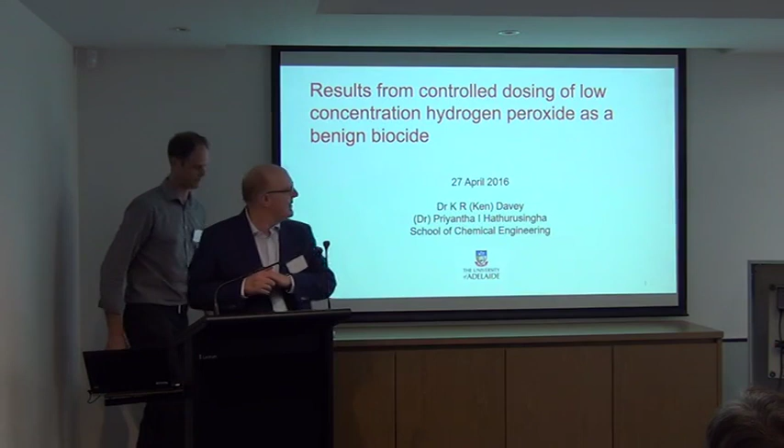So the talk is simply, the emphasis is on results from controlled dosing of hydrogen peroxide as a benign biocide. This work becomes very important. And tomorrow, Priyantha will get his PhD conferred at the university, so we can honour him in a small way here.

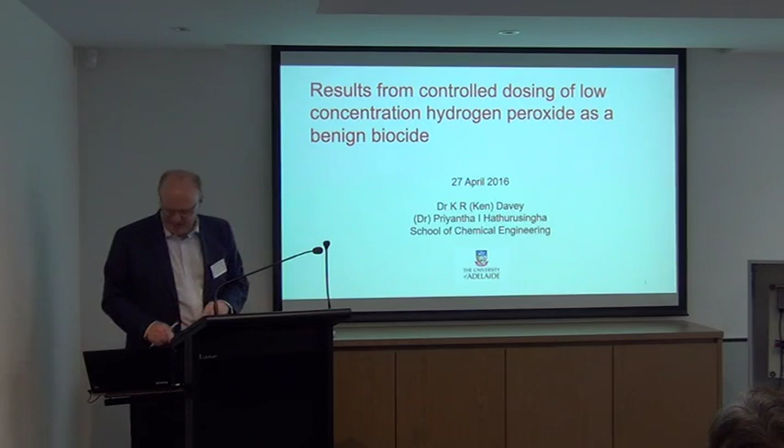All right. So the problem is in RAS farming, often you get cyanobacteria and other things, and they produce metabolites. Two of these are problems. They're geosmin and MIB, and they accumulate in the water, and then they eventually make their way into the fish flesh. And that gives quite an unsatisfactory taste, and you end up losing the sale of the fish as a premium protein.

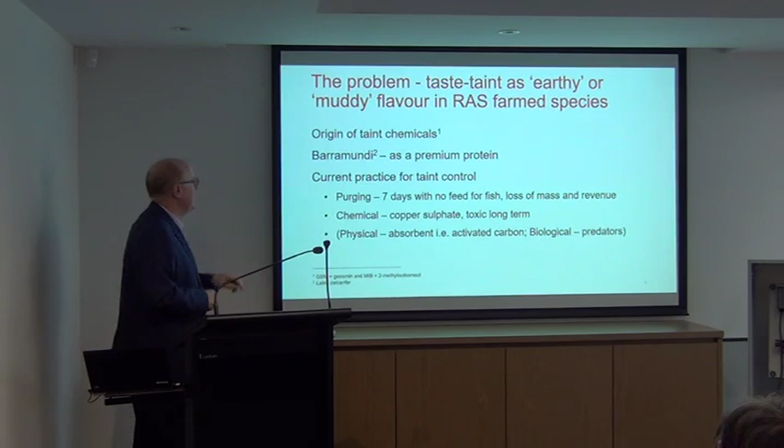So the current practice for taint control is purging, so you just have some clean water, and you don't feed the fish. So the problem is, of course, you're going to end up with a loss of mass and some revenue and some time wasted. You can use chemical things like copper sulfate. Long term, of course, they're toxic, and there are other approaches as well. So by way of background, you can grow a lot of other things other than barramundi, but we work with barramundi because it was available.

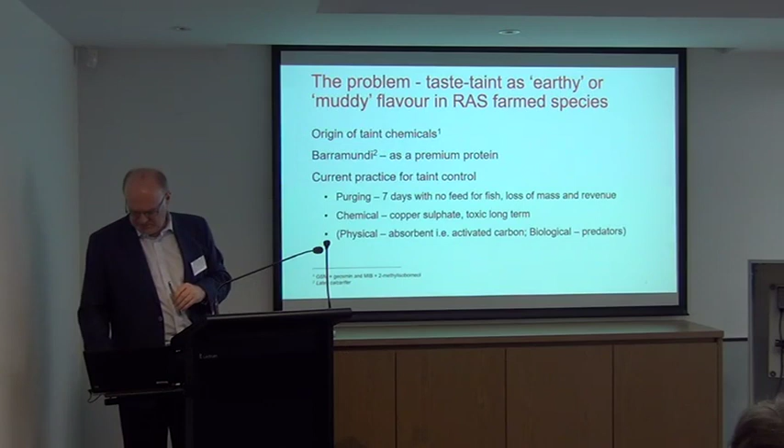So I'm going to introduce the talk, then I'm going to ask Priyantha to present some of the quite detailed work, and then I'll summarise with one slide the conclusions, and then we'll take some questions if you like. So hydrogen peroxide, the idea came to me, if you like. I did my postdoc up in Brisbane with CSIRO, and 100 years ago they were milking cows on the Atherton tableland, which is pretty hot. And so I was very interested to know how they got the milk down into the cities without refrigeration.

So well over 100 years ago, they were permitted to add hydrogen peroxide to the milk. The only byproduct is oxygen and water, so therefore it's perfectly safe. And this morning you probably exposed yourself a couple of times to hydrogen peroxide if you cleaned your teeth, dyed your hair, cleaned the bathroom, toilet, whatever. So it's quite a safe thing. So it's no chlorine, it's just hydrogen peroxide.

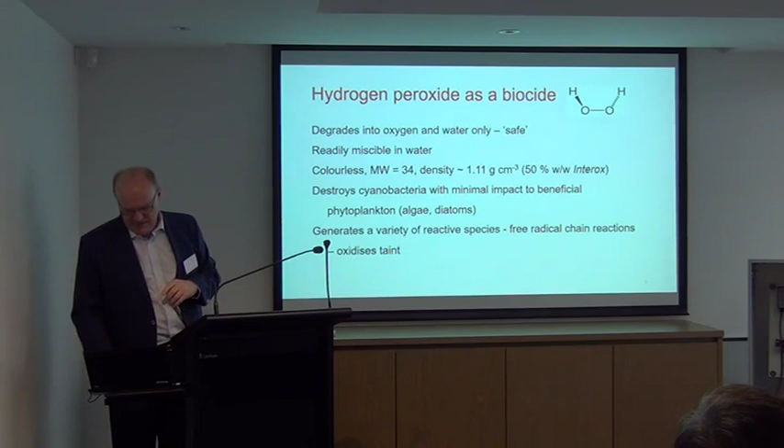So what we needed after the idea was to deliver the hydrogen peroxide. We had absolutely no idea of what concentrations and so forth. And Tim and Jerry have mentioned how we approached them. And unusually, actually, for industry, they were extremely positive. And they came to the university, we gave a talk, and the whole thing took off from there as really a gentleman's agreement.

For Priyantha to get going, you may know we needed Animal Ethics Committee science approval. South Australia is the only state in our Commonwealth where fish are animals. So in every other state, they're non-animals. That actually worked to our advantage, which I'm happy to talk about later actually. So he did a 3 months course, sat for an exam, had to get 80% pass to learn how to kill fish. We weren't allowed to actually slit the throat of the fish, so we had to find a way around that, and we put them in ice water. So that solved everybody's problem.

Also, we had to get approval from another group. So about the first 6 or 8 months, apart from writing some papers, we're getting lots of approval. Why do we need approval for hydrogen peroxide?

Because it's quite a strong oxidant. If you want to dye your jeans, just 1 or 2 drops of 6% will take the colour out of the jeans. It's 50% commercial grade, so that's quite a powerful oxidant.

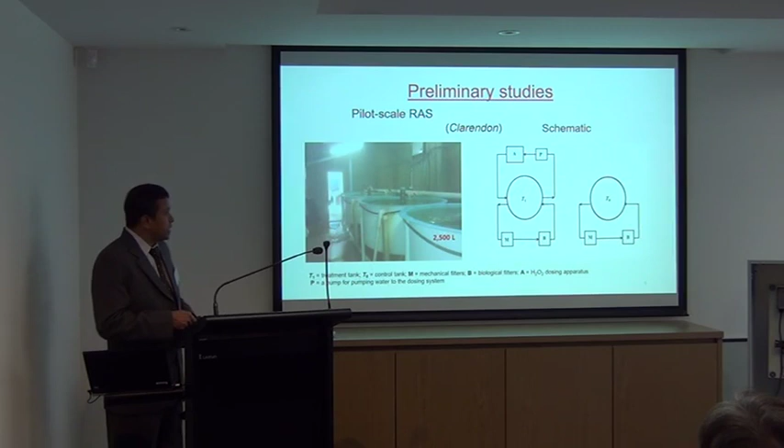First of all, we checked the growth water tank water for presence of geosmin and MIB. Yes, we found there's a high level of geosmin and MIB in their production tank water. So then we developed this type of pilot scale experimental setup. So you can see these are biological filters, mechanical filters, and like this. And so we use this nursery tank to set up the pilot scale RAS system. So one tank is around 2,500 liters.

So we use 2 tanks, and one was used to control dose the hydrogen peroxide, and the other one was not dosed. It was the control tank. So we fill up both tanks with commercial scale growth water, and we put 20 fish in each tank, and they were around 180 days old. Approximately weight was around 400 grams.

So then we started dosing hydrogen peroxide; initially we started working with 5 milligram per liter. We carried out the experiment for 35 days, and we did the water sampling twice per week. At the end of the experimental period, we sampled 2 sets of fish from both tanks: one is for the fish flesh analysis for flavor compounds, and the other one is for the veterinary testing.

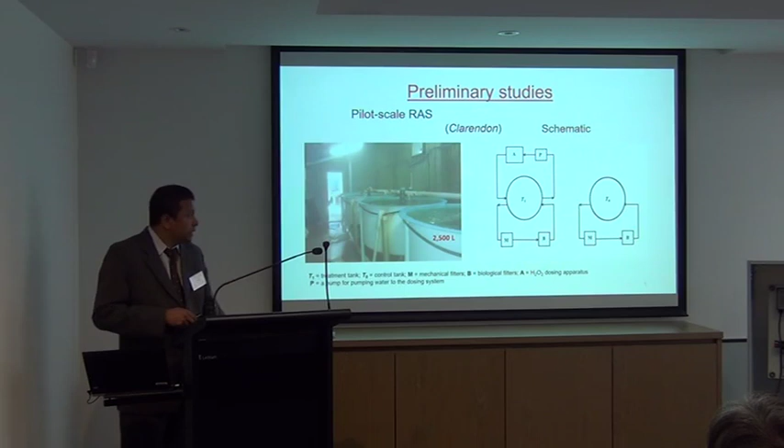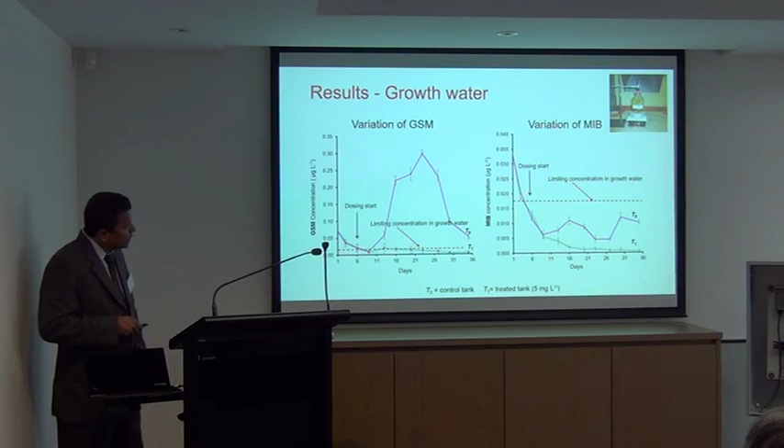Okay, these are the summary of results. This graph shows the variation of GSM with time, and this graph shows the variation of MIB with time. T0 is the control tank, T1 is the treated tank. So you can see a clear difference between the control tank and treated tank. And most importantly, the GSM concentration of the T1 treated tank was always below the limiting concentration. We could see the same scenario for MIB as well.

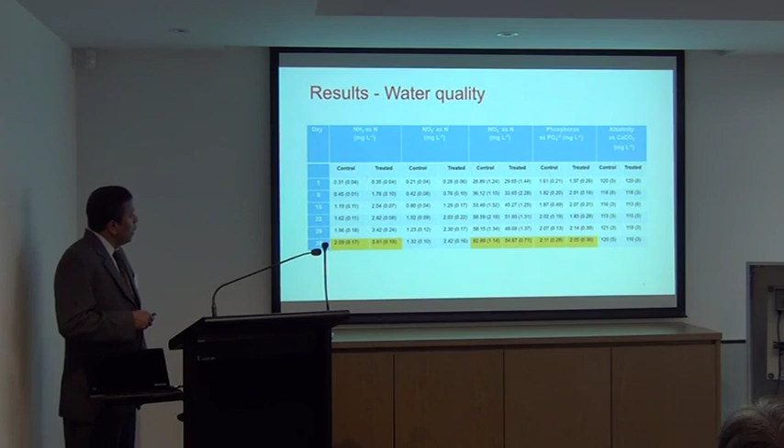Okay, we carried out some water quality analysis, and we analyzed ammonia, nitrate, phosphorus, and alkalinity. Particularly, we wanted to make sure whether both tanks have enough nutrients for the optimum growth of microorganisms. Yes, we found that, because we couldn't see much difference between the control tank and treated tank. Another criterion we were interested in was ammonia, and we found a little bit of ammonia development with time in both tanks, but it was not very significant.

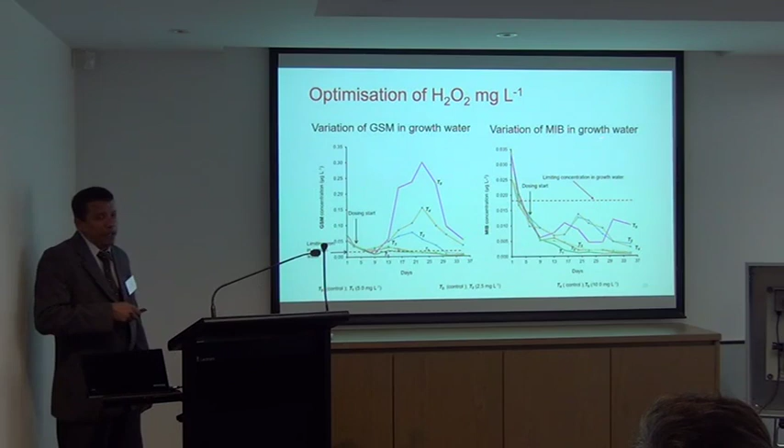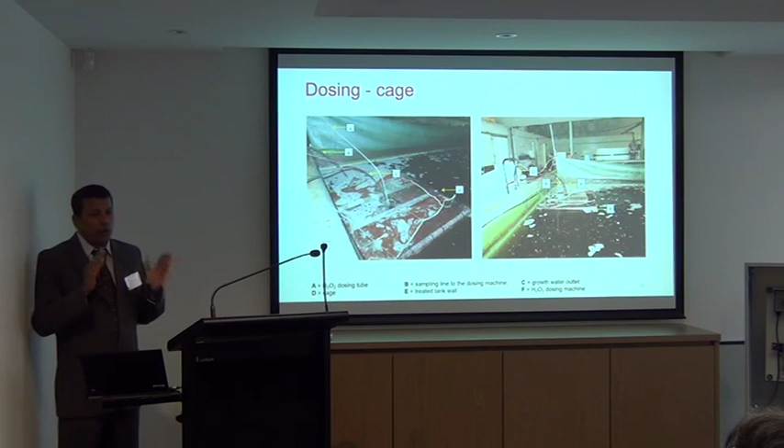So we use the pump to dose the growth water to the mixing tank, and then we dose hydrogen peroxide to the mixing tank. Then the treated water was released back to the growth tank. This system worked really well, and we didn't notice any higher mortality.

This is how the instrument was set up in the farm. It has wheels, and this one also. This is the mixing tank, and it also has wheels, because the advantage is you can move the whole system wherever you want in the tank.